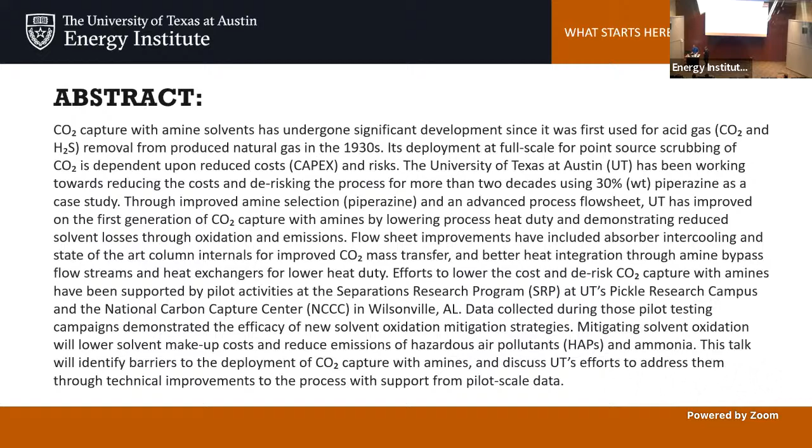My talk today is called Lowering the Risk of Commercialization of CO2 Capture with Amine Solvents. I'm going to ask that you hold your questions towards the end, because a lot of times my slides have a leading thought, and in the next slide or two, you might actually get your question answered. Nevertheless, I'll leave plenty of time for questions.

I'm going to cover the top conclusions from this talk. I'll go into the background and brief history of CO2 capture, referencing a patent from 1930 for produced gas treatment to remove sour gas components, including H2S and CO2. I'll give you an overview of UT's process for CO2 capture using piperazine, and talk about process improvements we've implemented that are analogous to what you'd see in other industry processes that compete with us. I'll talk about the barriers and risks to CO2 capture with amines.

Now, I want to pause and make sure you understand, this is only about CO2 capture. A lot of times we talk about CCS or CCUS, being carbon capture, utilization, and sequestration. Today, I will not be talking about sequestration or utilization; other folks work on that at University of Texas. I'm going to reference a FEED study, front-end engineering design, at the Mustang station in West Texas, so that I can cover the costs of CO2 capture as we know them.

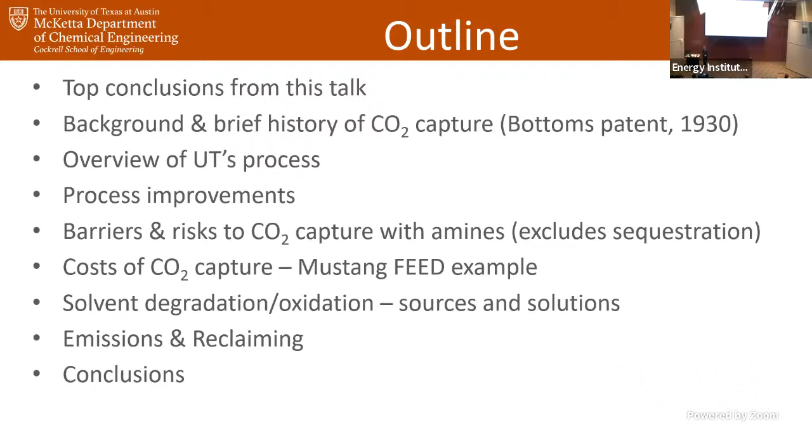I'm going to talk about solvent degradation and oxidation as a barrier to implementation of this solvent, and how we've gone about trying to solve that problem. I'll talk about emissions and reclaiming, which will lead back to the oxidation issue, and then go through those conclusions again.

The cost of capture is about $168 per metric ton of CO2. I've referenced here an IRR of 10% and a load factor of 52%, using the Mustang station front-end engineering design as our reference case from 2022. That was a very rigorous cost workup, and it's driven largely by CAPEX, very large CAPEX items.

Another barrier or risk is amine losses. These can be partially mitigated through flue gas impurity removal. I'll talk about a couple of strategies for that.

And emissions - this can also be partially mitigated through those impurity removals by diminishing the degradation of the process, but also by looking at some advanced emission control configurations. I also want to make sure you understand that the CO2 capture process with amines has evolved since 1930, with improved solvents and improved process flow sheets.

So I'm going to give you a bit of background and history of CO2 capture with amines. But first, I've taken a figure from the 2023 International Energy Agency update. This references data back to 2010.

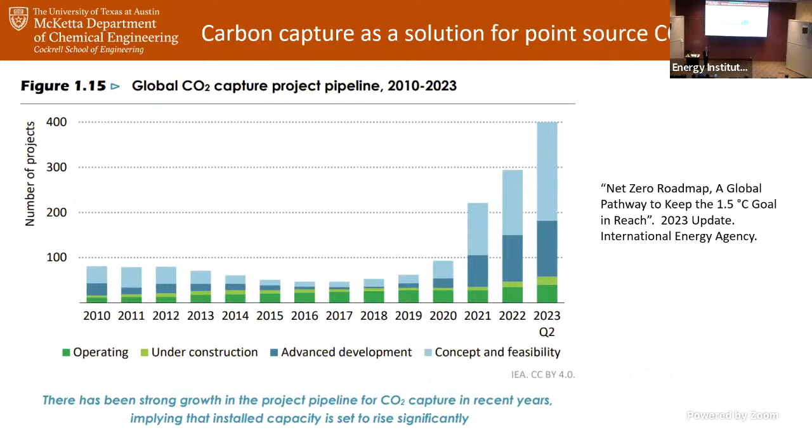This is the total amount of CO2 capture projects that were in the pipeline by year. The bottom line is, by 2023, last year, they reference as much as 400 projects that are either operating all the way through to concept and feasibility. I reference this figure because I want to make sure you understand that we really need to de-risk this process and understand the barriers to commercialization, because there are a lot of plans for this technology to be used for point source CO2 capture.

On the stripper side, we strip off the CO2 at high temperature by introducing steam in a reboiler at about 45 psig. This is, once again, the patented process, the old process. It would run at about 5 to 15 psig and also be a tray column. And you take that H2S and CO2 and vent it in the rendition of this process.

Now we have, if you will, co-opted this process for our purposes of CO2 capture. We bring flue gas in, and it's going to have oxygen and CO2. For a natural gas combined cycle, it might have 4 to 4.5% by volume CO2. It's going to run at about 1 bar, not 750 psig. It's going to be as much as 40 by 40 foot in a rectangular configuration, a very large column.

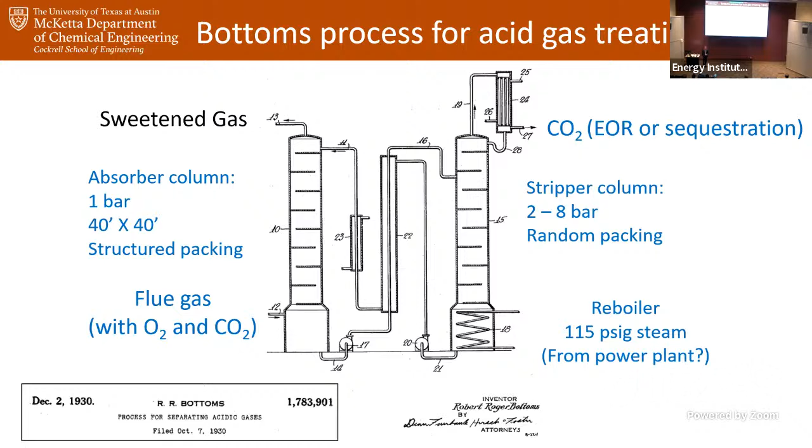The reboiler is going to take medium pressure steam, if you can, from a power plant - and that's what we call a parasitic load. You'll find out that in our FEED study, concluded in 2022, being able to derate the plant by pulling or extracting steam was not possible, so we go with a separate supply of steam. And then the other key difference is CO2 goes to EOR, enhanced oil recovery, or sequestration.

So what are the issues associated with this process? In the first generation for CO2 capture, the absorber sizes are 20 to 50 times as big as that absorber for the original gas sweetening process. You have greater volumes because you have lower pressures and large volumes of flue gas.

You need more packing to separate CO2 from the flue gas. At absorber pressures, it's a larger diameter column, meaning more CAPEX for these absorbers.

Energy use is important. For a power plant retrofit, CO2 capture could pull as much as 15 to 40% from the steam cycle of the power plant. The alternative is a new package boiler, but that's going to add CAPEX, as you'll see.

We're going to have flue gases that have oxygen and NO2, and we know those components will oxidize our amine. They'll oxidize other amines too, but I'm going to show you an example of how we study that. This causes oxidation of the amine and corrosion, and then we have to do CO2 compression to introduce the CO2 to a pipeline for EOR purposes or sequestration.

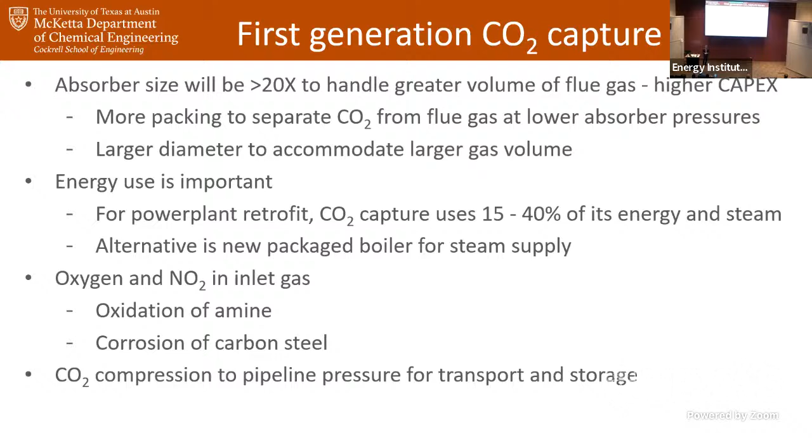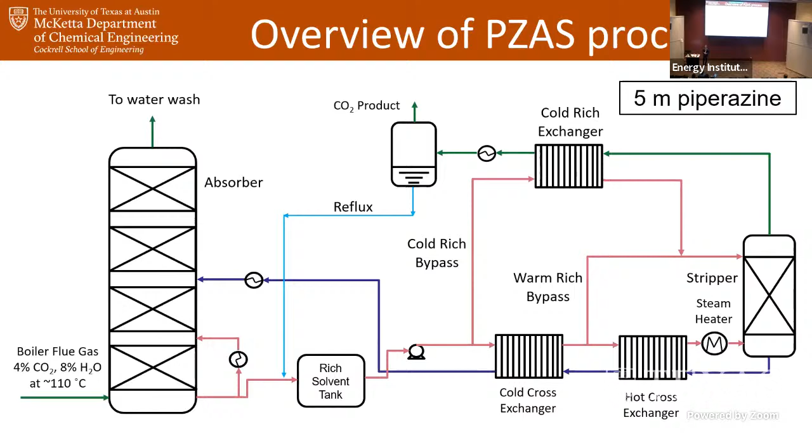This might be something in a gas separation column. It has a large pressure drop throughout the column, so that's one negative against it. It also has less CO2 mass transfer per unit volume.

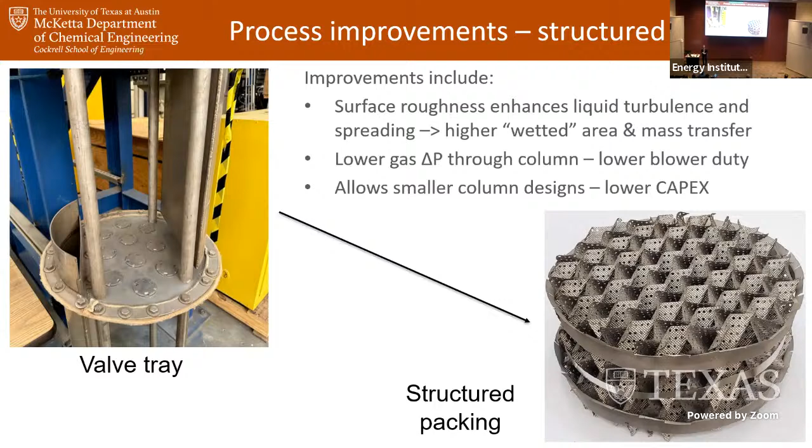So we've gone, and the industry in general has gone, to something called packing — in this case, structured packing. You get surface roughness which enhances liquid turbulence, improves the wetted area, improves mass transfer per unit volume, and lowers the pressure drop through the column so we can use smaller induced draft fans. It also allows for smaller columns, lowering CAPEX. This is one very good example of a process or mechanical improvement.

So I mentioned two slides ago the heat duty in the steam reboiler. This is a plot of heat duty in gigajoules per metric ton of CO2 removed for various solvents developed over the years, starting in the 1980s. Think of this as sort of first generation CO2 capture — typically monoethanolamine — and we're going to be around 4.2 to 4.3 gigajoules per metric ton of CO2 removed.

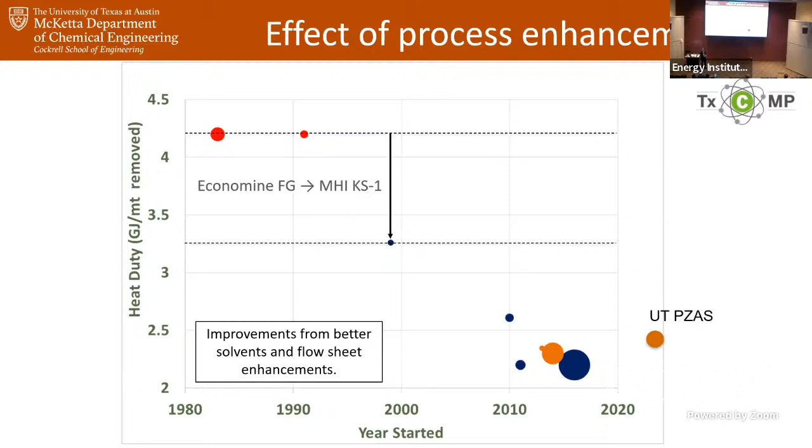The industry in general has gone to advanced solvents, different chemistry, different amines that improve the process. An example is MHI's KS1 solvent, which drops heat duty down to about 3.2 to 3.3 gigajoules.

Through improved process flow sheets, MHI has their process improvements, and the industry's gone down to somewhere between 2 and 2.5 gigajoules per metric ton of CO2 captured. Cansolv's DC-103 is a very good example of a solvent that's out there in industry being used, and it's around 2.3.

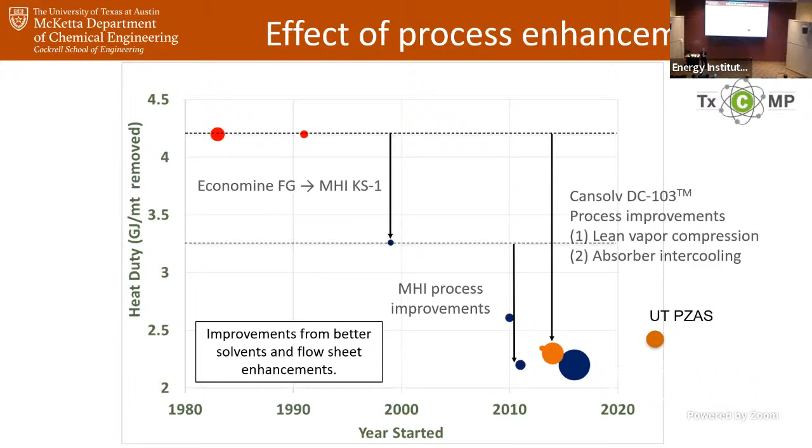The UT PZAS solvent, that's piperazine. It's a cyclic diamine, a stable solvent that's very fast, with good kinetics for reaction with CO2 in the absorber column.

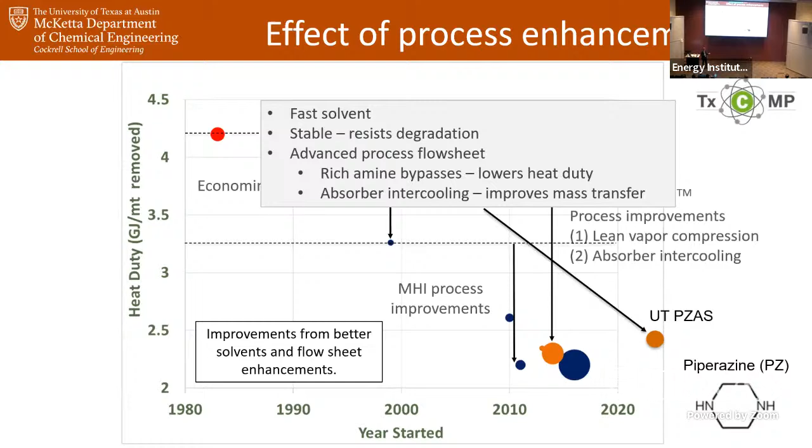We have an advanced process flow sheet with those amine bypasses I mentioned, as well as absorber intercooling, which improves mass transfer. So we're competitive over here, and quite honestly those numbers are probably not much different between ours and theirs.

So to put this in perspective, from our feed study done at the Mustang station, that was a 460 megawatt NGCC, the capture over the course of a year at a 52% load factor would be about 1.6 million metric tons of CO2 if this plant were built.

So let me back up and state, we did a full front-end engineering design, and we have a package that a developer or an investor could come along and build that plant. To date, that has not happened. So this is an engineering study. The plant is not actually operational.

Nevertheless, our capture rate would be about 0.4 metric tons of CO2 per megawatt hour of generation. That heat duty, if extended out over the course of the year, would be about 3.8 million gigajoules per year. That heat duty represents about 14% of the plant fuel requirement to actually operate that plant in its gas turbines.

And finally, the power requirement for the other equipment associated with the process—these are pumps, fans, and compressors—comes to about 14 megawatts. Not trivial, it's around 3% of the plant power.

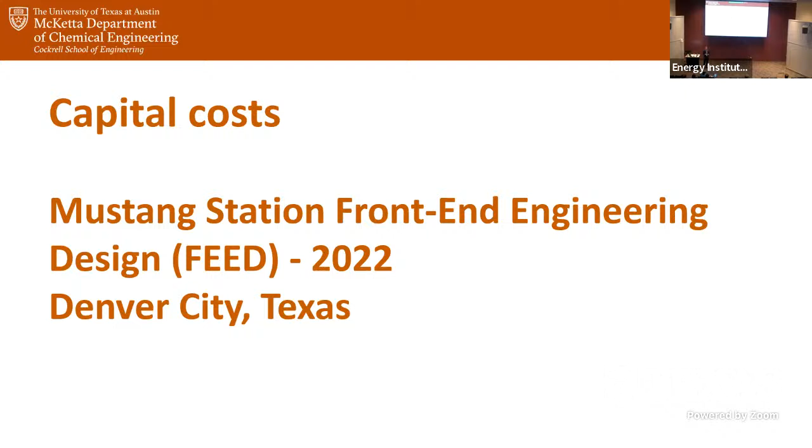So let's get to some of those barriers and risks to CO2 capture with amines. I first want to talk about the costs, and in particular the capital costs. I'm going to reference that front-end engineering design study.

It was done on our host site, which is Mustang Station in Denver City, Texas. It's a 460 megawatt NGCC, with 2 NGCC trains in aggregate between the two, about 460. They dispatched to the Southwest Power Pool, not ERCOT.

There's a lot of available undeveloped land out there, so this is a good thing and actually can be a bad thing, and you'll see why I say that. It's in the Permian Basin. In fact, the site's 1 mile from a CO2 pipeline taking CO2 to EOR fields, so it's fortuitous in that regard.

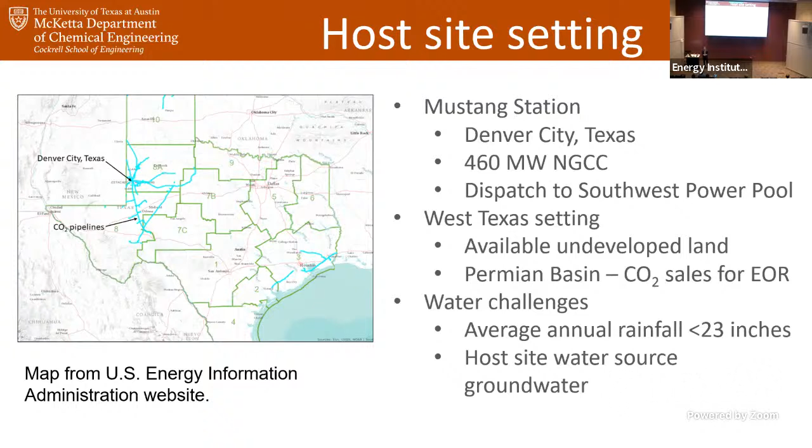And then finally, a very important factor is because it's West Texas, there were less than 23 inches of annual rainfall. The plant itself uses groundwater. This is a constrained resource, and we were told from the very beginning that groundwater was not available to us for some of our cooling duties.

So let's look at some key project decisions. We went with 2 parallel process trains, and the idea there is to match the dispatch of the 2 power trains. This also allowed offsite fabrication of the larger pieces of equipment at smaller scale so that they could then be hauled over the road to the site.

If you build 1 process train, the strippers and some of the larger pieces of equipment are simply going to be too big to fabricate offsite for cheaper. So this was a good decision.

Smaller heat exchangers were chosen because at the time of the study kickoff, natural gas was selling for about $2 per million BTU. By the time we got a year into the project, it was up to $8 per million BTU. I will tell you now, fast forward to today, our decision to go with smaller heat exchangers and higher heat duty looks like a smart one.

Because in the Permian, we have stranded nat gas and it's trading negative as of last week. Elsewhere, it's trading around $2 to $3 per million BTU.

But the bottom line is this is a classic trade-off. Do you go with larger heat exchangers, lower your heat duty, or in fact go with smaller heat exchangers, lower your CAPEX, and just pay the hit on the natural gas?

Because steam extraction from the power plant was not possible, they simply weren't in a position to be able to derate their plant. We went with packaged boilers for our steam for the regeneration side of the process over on the reboiler on the stripper.

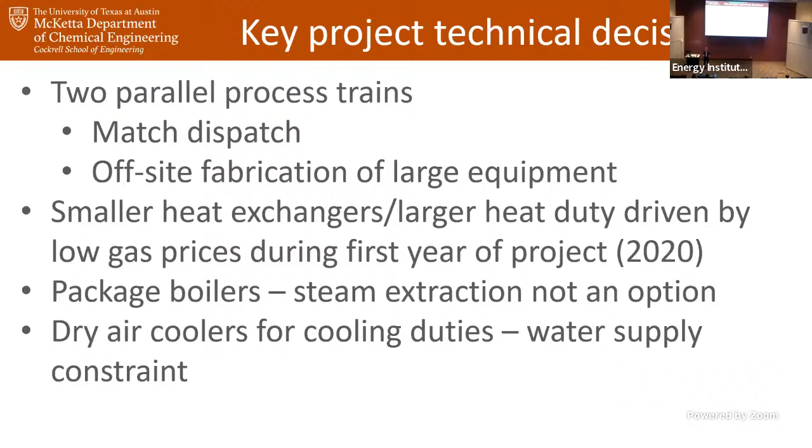So this is a little bit of a divergence from the CAPEX. I'll get back to it, but I know this is a question I'm going to get, so I'll cover it now. This is the cost of CO2 capture in dollars per metric ton of CO2 from our FEED study, shown over a range of internal rates of return from 0 out to about 10.

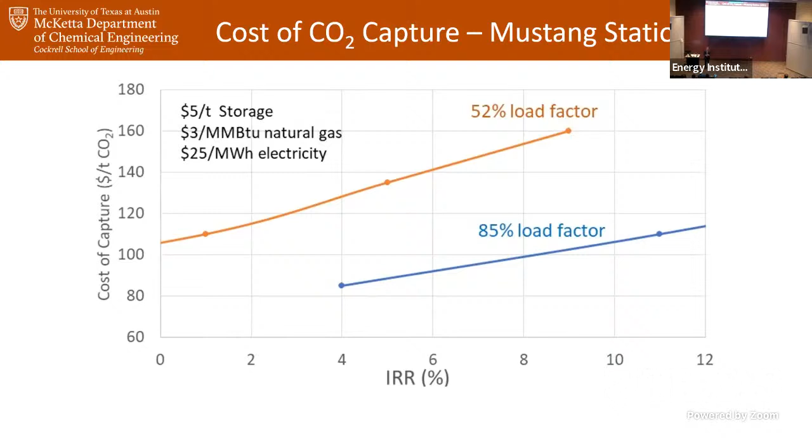When we kicked off the project, the Southwest Power Pool was seeing more and more renewables come online. We started with a load factor assumption of around 80 to 85%. But a year or two into the project, a realistic load factor for the NGCCs was about 52%, which lowered the amount of time those NGCCs would be feeding CO2 to the capture plant. In March of 2022, as much as 90% of power fed into the Southwest Power Pool was renewables, and that year averaged about 41%. This really changed the economics of the project.

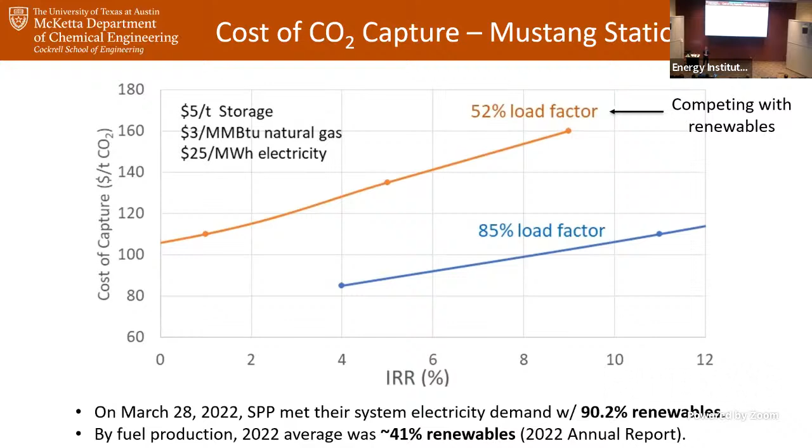If you look at an IRR of 10 and an 85% load factor, you're going to be somewhere around 105 to 110 dollars per metric ton of CO2. But in fact it's probably more like 165 to 170 dollars per metric ton. If you can afford a lower internal rate of return, you can lower that, but nevertheless, at any realistic number, it's going to be above $100 per metric ton CO2.

Now I'm going to get back to the capital costs and try to understand what drove them. This is a tabulation of what we call total overnight costs. So if you said, build me a plant and have it running in 24 hours — I have to design it, spec it, get costs, and put everything together and build it by tomorrow — that's what total overnight costs refers to. Those are today's costs, and these are 2022 costs.

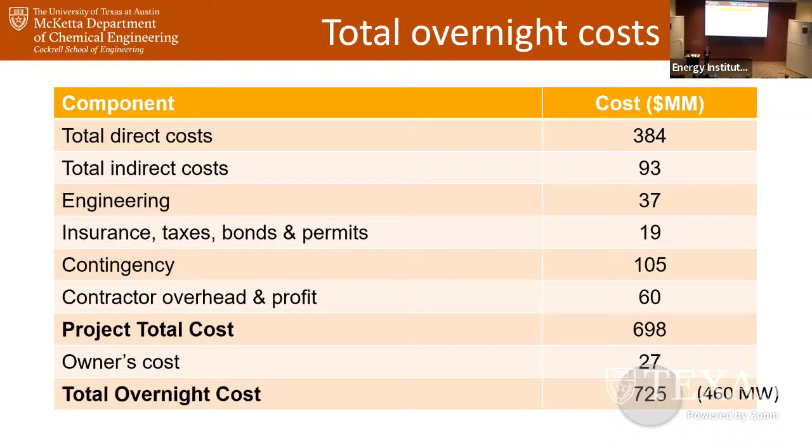So this is a tabulation, and for the most part the total directs were about 385 million, which included all the large capital cost items. The total was about 725 million for a 460 megawatt power plant. So that's largely what's driving these costs.

So let's look at what we can do with the capital costs associated with the absorbers. Can we reduce their size? This is the actual diagram from our EPC in the FEED study report. Our EPC was AECOM. We have two of these — 40 by 47 foot rectangular stainless steel absorber columns.

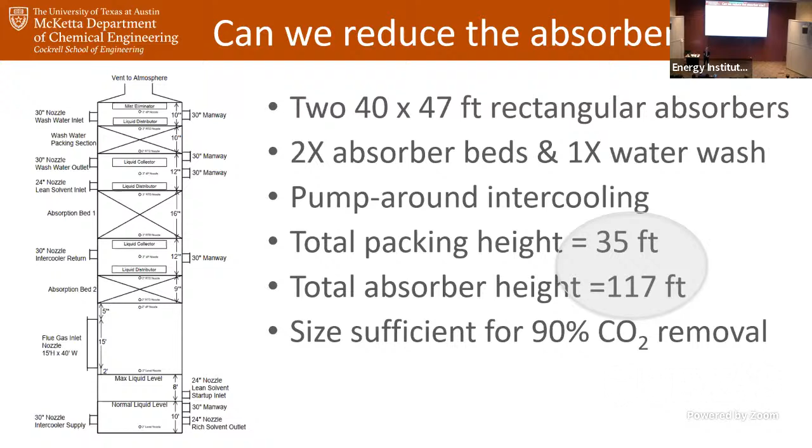They have two absorber beds and one water wash bed, with intercooling via pump-around intercooling, and a total packing height of 35 feet. But the total column height is 117 feet, and this size and packing is sufficient for 90% CO2 capture on average when the plant's running. So the question is, why is the packing only 35 feet out of the total column height? That's where all the CO2 mass transfer takes place — can't we shorten this column and get the same performance while lowering our CAPEX?

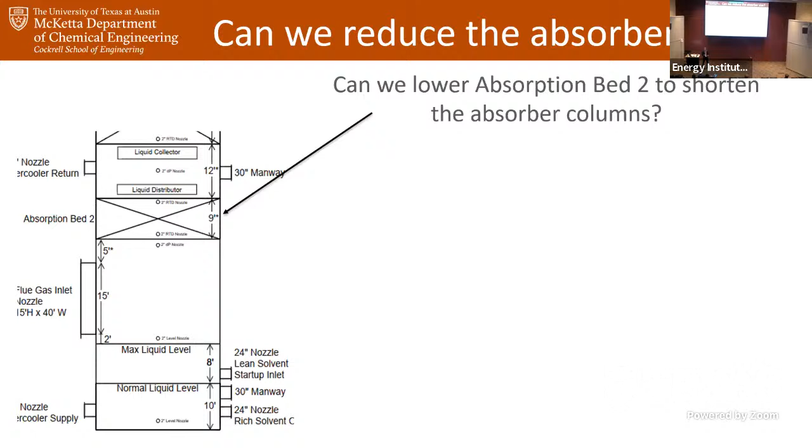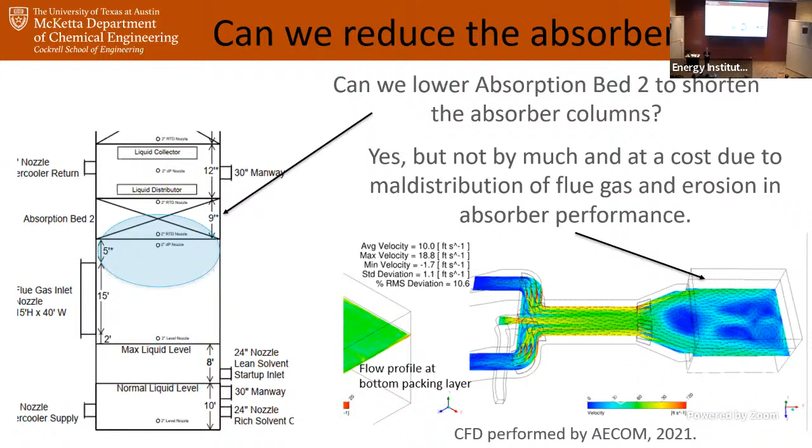So we can do that, but we actually shorten this zone and mess up the fluid dynamics, the gas fluid flow dynamics, and we get maldistribution. So this is a classic example where rigorous design principles drive certain things you simply can't get around when building these plants.

So, other considerations driving CAPEX. I put this table up for two reasons. One is because in retrospect, we said maybe there's some things we could have done different on the Mustang Station FEED. But it's also a good way to think about: what if Mustang Station wasn't located in Denver City, Texas? What if it's located closer to the coast or to a river, where you have access to surface water for cooling duties, and other things aren't constraining your project?

Or perhaps you don't have as much area. So we went and considered each of these. Air cooling systems - maybe we could go with water cooling. Now, I'm not going to put a number to it, but these are things we can consider. We could go with carbon steel in the absorbers because these things are very large, and maybe we can accept carbon steel and the amount of corrosion we have over its lifetime.

We had a lot of available land, and we thought at times that maybe our EPC was using too much of it, increasing the ductwork and piping and increasing the cost of those things. So can we shorten the ductwork by going to a tighter configuration? Solvent reclaiming - I'll talk briefly at the end about that. Maybe we could go with a turnkey service instead of having a $20 million permanent installation on site.

The power plant said you cannot do steam extraction. This was something other FEEDs around the nation have looked at. Some of them can do steam extraction, but generally speaking, you're going to find the power plant's not willing to derate their plant, so steam extraction is not possible.

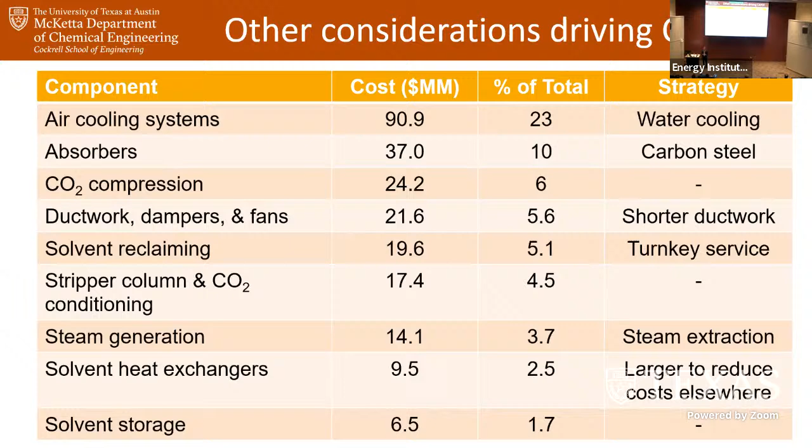And then finally, solvent heat exchangers - maybe we should go with larger heat exchangers, and that trade-off actually has benefits going the other direction, because you can make smaller some of the other process units in the plant.

So let's move on to another barrier or risk to the process: amine losses and mitigation methods associated with those losses. A couple of years ago, we started putting together a table from the published literature of solvent makeup rates.

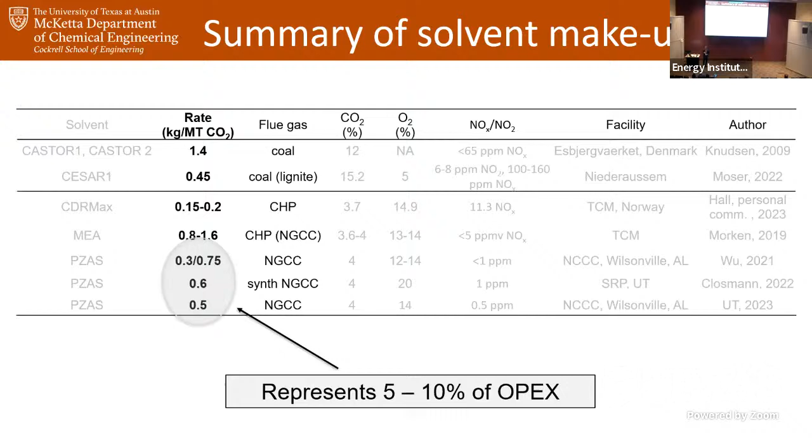These are in kilograms of solvent per metric ton of CO2 captured. I've kind of shaded out some of this because I don't want to focus on other solvent developers, but I just want to point out that we have a range of rates - all the processes have to have some solvent makeup. This is from degradation, from emissions, perhaps just from not tight operations. But in general, we find that piperazine is around 0.5 kilograms made up per metric ton of CO2 over the course of the operation of the process, and we're somewhere in the low to middle range of that.

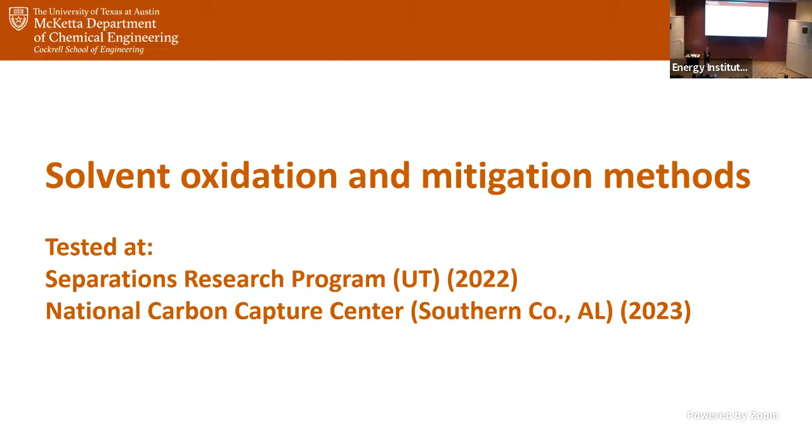But the bottom line is: all these solvents actually experience some form of degradation. How can we mitigate that? We studied that at a pilot scale at a couple of places - one is at the Separations Research Program out at the Pickle Research Center of UT, that's where I reside, and also at the National Carbon Capture Center in Wilsonville, Alabama.

We know that - we've studied it in the lab on a number of occasions, and we can run pilot plants and determine the rates. That's imparted as dissolved oxygen, which we call DO, or it can be entrained oxygen bubbles that travel downstream in the process. We've studied stripping the DO out with nitrogen sparging in the absorber sump - think of this as intercepting that oxygen as early as you can, stripping it out before the solvent goes to the hotter side of the process.

We know these reactions will accelerate as the solvent gets hotter. The other impurity is NO2, and it can be as much as 2 to 5 ppm. It doesn't take much NO2 to react with the amine and cause oxidation processes.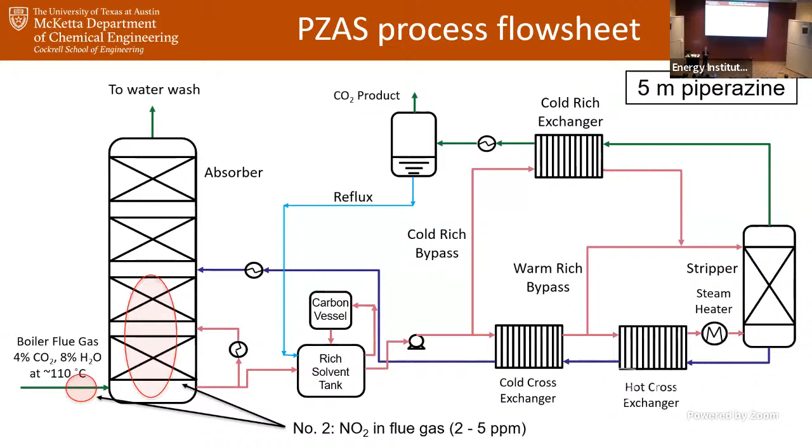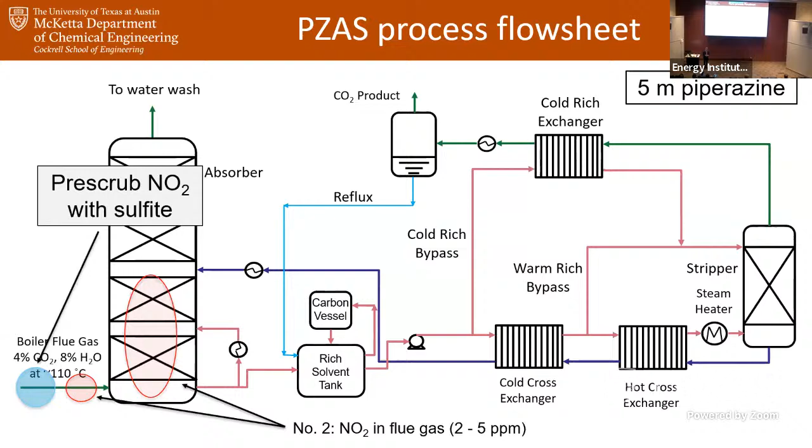It's the same thing. The flue gas comes in, contacts the amine and the absorber packing in the sump, and causes that oxidation. We can pre-scrub that upstream before the flue gas ever gets to the absorber, using sulfite and thiosulfate. The chemistry is not something I want to get into today, but in essence we convert that to nitrite, which drops out in the pre-scrubber train, and flue gas passes on. We can remove as much as 90% of the NO2 and diminish the rate of oxidation of the solvent.

I don't know how much chemistry you guys remember, and I'm not going to get into a lot of chemistry, but what we do when we run these campaigns is collect daily samples. We ran our campaign at the National Carbon Capture Center for as much as 6,000 hours. Each day we collect liquid and gas phase samples, and with the liquid samples we run a number of analyses at UT and elsewhere. One of those is we look for amino acids. Piperazine itself will oxidize to form these, just two examples of amino acids we'll see in oxidized piperazine.

There's several plotted here, in millimoles per kilogram over the course of time throughout our campaign. Before I move on, there's a theme here you'll see in another slide or two. You see colored background, and each of these different colorations represents a step change in our oxidation mitigation methodology.

So we start out pre-scrubbing out the NO2, stripping out the DO in the absorber, and running a carbon bed to adsorb out impurities. Then each step, as we change the color, we remove a mitigation method, and we see these amino acids start to accrue in concentration. This white background, we have no mitigation methods online, and we see these amino acids going up. The gray here, we bring those mitigation methods back online.

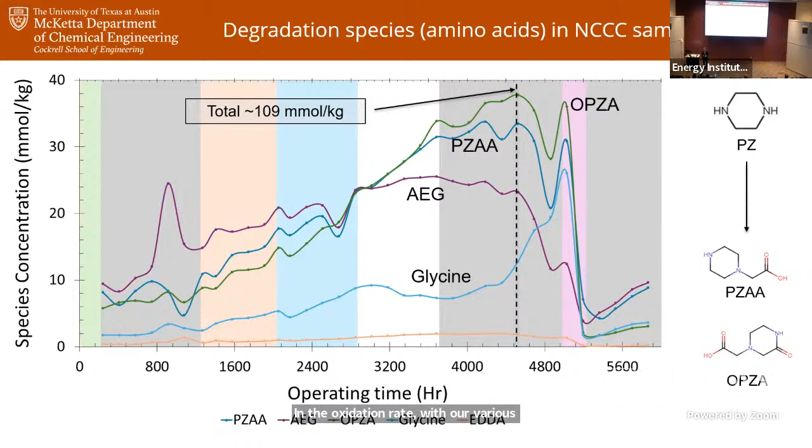And in aggregate, we see around 30 to 75% reduction in the oxidation rate with our various mitigation methods. So we can mitigate the oxidation. Now let's talk about what that means in terms of emissions through gas phase monitoring data we collected at the National Carbon Capture Center. I've shown the process flow sheet again, but I've added one thing, which is a separate water wash column. Most of these systems are going to have a water wash capability. The flue gas goes up, travels up, the amine travels down. The flue gas, we've removed 90% of the CO2, but there's some degradation that happens.

So we get degradation, volatile degradation species go out, and we go to a wash tower, a separate wash tower, where we can - think of this as emission control - wash out some of those species that are formed in the process. In fact we get some piperazine there, the parent amine itself. We measure in the gas phase here and here on the outlet to the wash tower, and we want to know what the trends look like there.

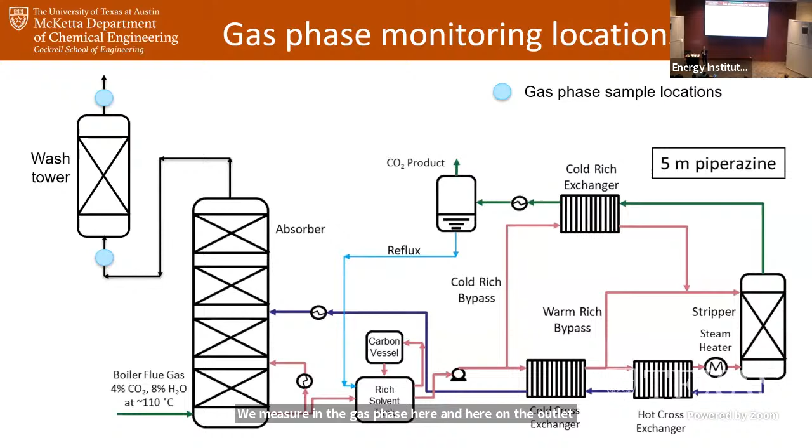So doing that, we use an instrument called an FTIR, and we can measure ammonia. These are the ammonia data in parts per million, plotted over the course of that same campaign out almost 6,000 hours. We see the ammonia in the gas phase starts out around 2 to 3 parts per million, then starts going up as we take our mitigation methods offline. We're starting to degrade our solvent, and we're starting to see ammonia - ammonia is an oxidation product of piperazine.

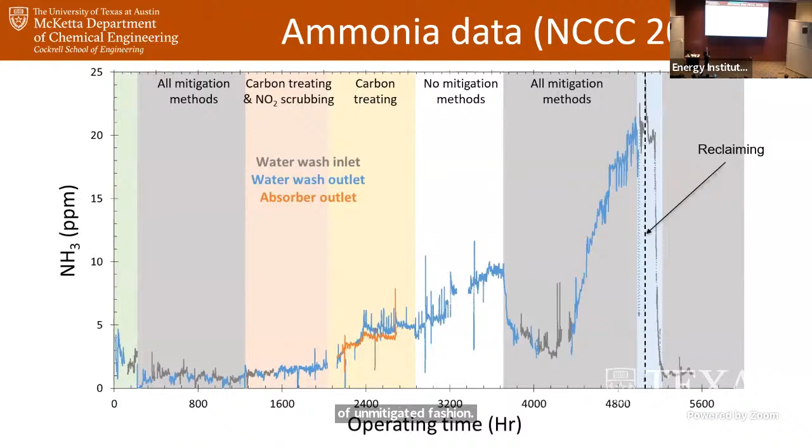You would see this with monoethanolamine, you'd see this with a lot of other amines. Then at some point, with no mitigation methods, it goes up. Finally we bring those methods back online to see if we can abate the emission, and in fact we do. Then, as I alluded to, there's some strange things happening late in the campaign that make our life interesting - we start to see the ammonia go up in a sort of unmitigated fashion. We implement reclaiming, and we drop that back down. So, can we mitigate ammonia emissions?

This is the absorber column only. I'm showing the process configuration without the stripper and the heat integration. It's the absorber, and it's that separate wash tower that I alluded to. So the flue gas goes in the absorber, goes up, travels through the wash tower.

One of the things we can do is run several different configurations at the National Carbon Capture Center, and we did just that. You'll see that in a tabulation of data in a moment. But we can convert that to an acid wash, a dilute sulfuric acid wash. And when we do that, we actually react the ammonia that's evolved with the sulfuric acid to form ammonium sulfate and prevent those emissions of ammonia.

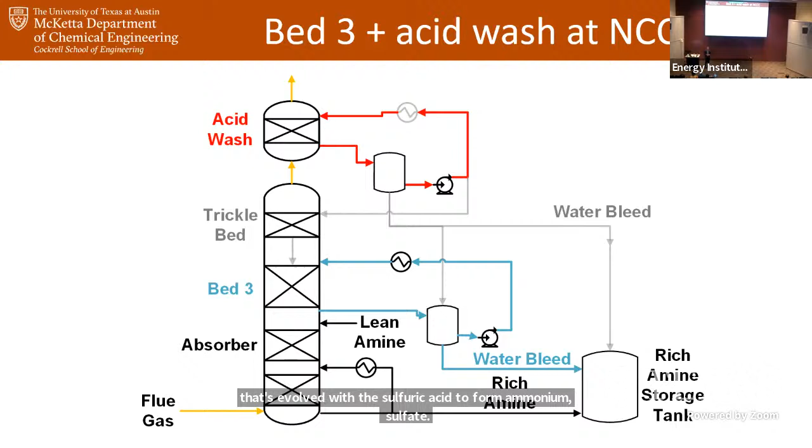This is a tabulation of data collected with an instrument called a PTR-TOF mass spec. It's data measured on the gas phase outlet location I depicted with the blue dot two slides ago. I have this tabulated by different water wash configurations. There are two species here. We measured several species, but I've only listed two for the sake of time. One is ammonia - mind you, these are in parts per billion. And these are acetaldehyde in parts per billion.

Now we have a class of compounds that the EPA calls hazardous air pollutants, or HAPs, and acetaldehyde is one of those. This was a species we were particularly interested in understanding - were we going to see much acetaldehyde coming off our process late into our campaign? We got a very fortuitous result. In fact, it's never more than about 50 parts per billion. We thought it might be higher. But the interesting thing is, the water wash configurations really don't affect this number. It's typically going to be somewhere around 35 to 50.

But you can see with the ammonia, using our conventional water wash, we're at 7.5 parts per million, or 7,400 ppb, upwards to 25 parts per million late in our campaign. It was only when we implemented that acid wash that I mentioned that we brought that number down - and boy, did we bring it down. It was 10 ppb with our acid wash. So this is very good evidence that we can utilize advanced water wash configurations to control, in this case, ammonia.

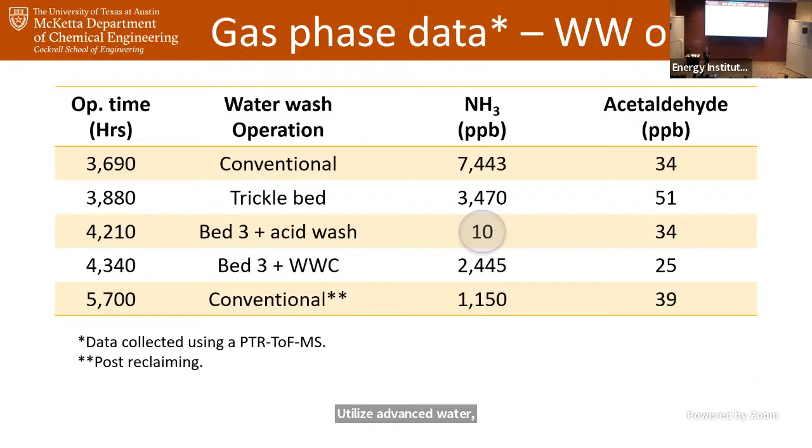So I've alluded to solvent reclaiming on a couple of occasions, and this is a little bit in the weeds - this isn't really the central focus, but it actually had a significant impact on our thinking at the end of this campaign. So what is that? We brought a turnkey offsite process to the plant. It was a single stage thermal reclaimer - think of it as a single stage distillation unit. We bring a slipstream of solvent off to that unit, it goes through this single stage thermal reclaimer, and then we return the solvent.

But what we really want to know is, did it change the chemistry of the process, and did it change emissions? So now I've put up the ammonia plot in parts per million again over the course of this campaign - you saw this earlier. We can see the mitigation methods are taken offline, and we bring them back online, and then they go back up. But at some point, they're going up in a sort of unmitigated fashion. It was only when we implemented that single stage thermal reclaiming process that we brought down the ammonia emissions and the oxidation of the solvent to something very similar to what we saw at the beginning of the campaign.

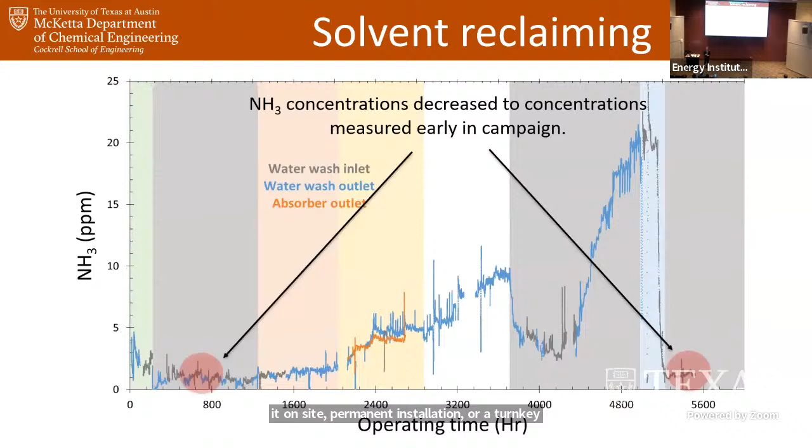I'm going to finish with my top conclusions, which I started with. The barriers to deployment include the cost of the process. We're looking at about $168 per metric ton of CO2 removed, from our FEED study completed in 2022. This was largely driven by high CAPEX.

Amine losses can be partially mitigated through flue gas impurity removal, things like oxygen and NO2. Emissions are also impacted by that very same thing. They can be partially mitigated through reduced solvent degradation and through advanced emission controls. I showed you how we implemented an acid wash to control the ammonia emissions.

And if nothing else, realize that the process, folks really started working on this, I'd say in the late 70s and 80s, to think of it as a CO2 capture process, that was typically for CO2 for other purposes, not for sequestration. But when they did, they started with solvents like monoethanolamine. We've improved on that with second generation solvents.

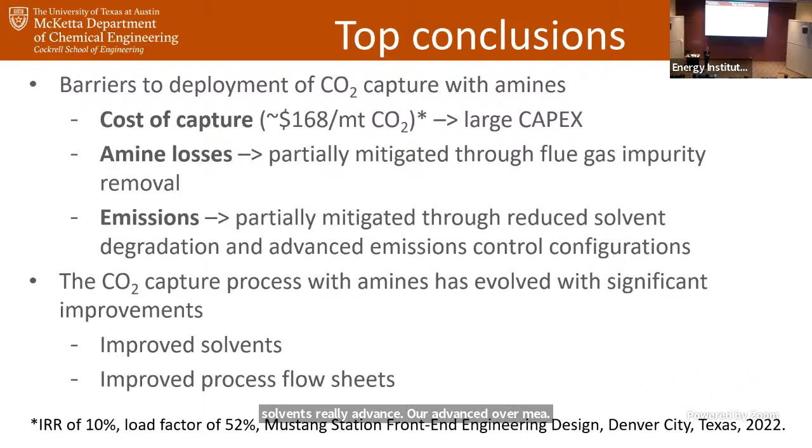There's a European open source solvent called CESAR1, similar to piperazine in some ways, and those solvents really are advanced over MEA. But we also have advanced process flow sheets, which lower the heat duty of the process, lower the energy requirement.

So I'm going to acknowledge the Department of Energy who funded the FEED study, and they funded the pilot campaigns that I've referenced. Dr. Gary Rochelle's research group - I got my PhD under Dr. Gary Rochelle, and I actually work with him at the Pickle Research Center. The Texas Carbon Management is our consortium of 17 different industrial sponsors who sponsor a lot of our work.

The Separations Research Program, and Dr. Frank Seibert ran our SRP campaign that concluded in 2022. The Center for Energy and Environmental Resources, we sort of reside in that center at the EME building at the Pickle Research Center. The National Carbon Capture Center in Wilsonville, Alabama. And then we've received partial funding from ExxonMobil and Honeywell UOP for some of the data you saw today. And then finally, AECOM was our FEED for the EPC for our FEED study.

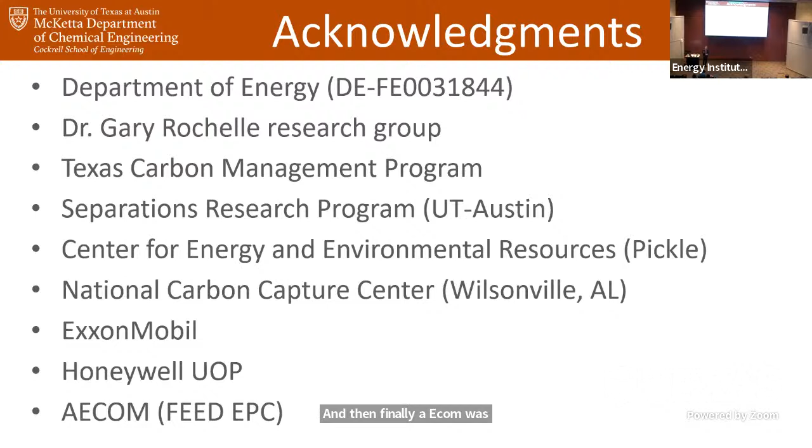And I will take any questions you might have.

So, to some degree, you mentioned the size of these absorbers and strippers - I think you said in your FEED study, 117 feet tall, correct? And there's large diameter. Is the size of this diameter and height driven by - let's just think about a power plant capturing CO2. Is that driven, which dimension is driven by the size of the power plant? Is it both dimensions, like the diameter and the height, or is it mostly one or the other? If we're sticking these somewhere where we know power plants are, just to try to imagine what the footprint is.

So not so much is the height driven by the flue gas volume - the flue gas volume drives the diameter. And the flue gas volume is so much higher because we're at lower pressures, as well as the fact that, think of a 460 megawatt power plant, you're going to have a lot of flue gas being introduced to these absorbers. The height is driven by the CO2 capture need, the amount of CO2 that you need to remove from the flue gas. So typically we think of 90% as sort of a minimum. If we redid this FEED study, our basis would probably be 95 to 97% CO2 removal, and in fact we might have to go with more packing, slightly taller tower, absorber column.

All right, I'm gonna go to one question online, then one here in the room. So the question online: what would be the value of having inline monitoring for the different types of analysis and tracking of chemical products that you've shown, or where are the biggest gaps in online monitoring? I think you're doing little individual samples every hour or every day and things like this.

Exactly, okay, so I'll repeat the question. So what's the value of having online monitoring throughout the - I'll think of it in two contexts. First is in a pilot campaign, and the second is in a commercial plant. And the value would be great.

One set of data that you weren't able to see today because of a time constraint - if I had 15 more minutes, I'd love to get into it - is that we did online monitoring for things like dissolved oxygen, because we were removing dissolved oxygen and wanted to know how effective it was. We found that online monitoring of the liquid phase dissolved oxygen can give you a good indicator of the health of the solvent at any given point in time, and we could see that trend toward a more oxidized state. That's in the liquid phase. We also implemented online monitoring with an FTIR instrument for the gas phase. That's something pretty much every pilot campaign does, using either PTR-TOF mass spec technology or FTIR or some other technology in real time to look at the emissions coming off the plant. So there's a lot of value in online monitoring, and if I were a plant owner, I would expect that to be an element of the design.

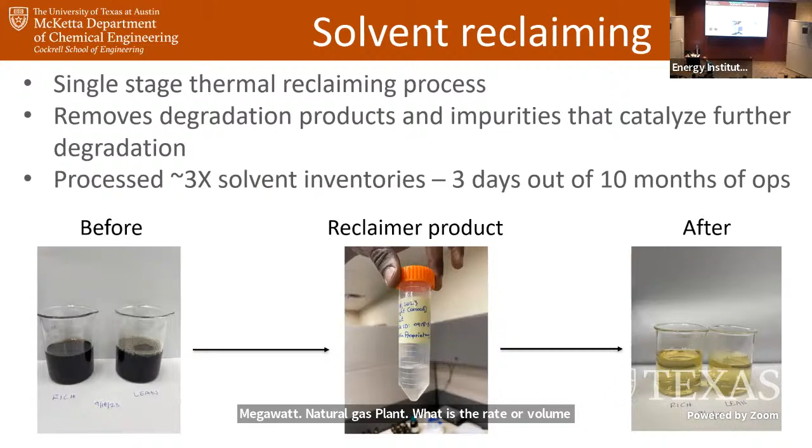What is the rate or volume of CO2 captured that would be delivered in a pipeline? Yeah, so I put in the table, that little box—I think it's 1.6 million. Let's get there: 1.6 million metric tons of CO2 per year at a 52% load factor. So I think that's the number the person's looking for.

Right, sounds good. All right, question in the room?

Yeah, thank you, Dr. King, and thank you, Dr. Kosman, for the presentation. My name is Bim, I'm from Indonesia. I have two questions. The first one is quite superficial and technical: you mentioned solvent reclaiming—is it just pure chemical reclaiming, or do you use some kind of thermal reclaiming and also physical reclaiming? The second one is, I'm a geologist by training, and my concern is more about the purity of the carbon. How pure does it have to be before it's injected into the geological formation, because if there are some kind of chemical impurities outside the carbon, it's going to affect the longevity of the geological formation, right? So how pure does it have to be before it gets injected?

Okay, I will answer the second question first. There's two answers that come to mind: how pure does the CO2 need to be for sequestration purposes. We have a spec of less than 10 parts per million oxygen, which we measured in our recent National Carbon Capture Center campaign—that was sort of an open question. And the second one is 95% CO2 or greater. There are other impurities that I think we would probably look to make sure are low enough, but I'm not really sure off the top of my head what those look like. I do know those two we met.